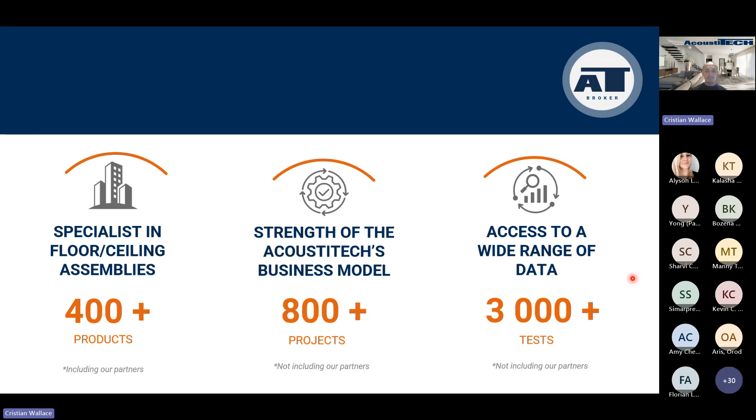So now I think it's time to talk about acoustic code requirements. First of all, we're going to start talking about airborne noises. So what are some examples of airborne noises? These are going to be noises that travel through the air, and it can be anything like music, television, dog barking, for example. These are measured with a rating that we call STC. STC stands for Sound Transmission Class. In Canada, if the audience here is from Canada, you must know that building code in Canada has a requirement for STC, and that requirement is an STC of 50. That is the minimum rating that is required for multifamily residential buildings. That is in building code.

Now, there's also going to be another rating called ASTC, and I want to explain really quickly the difference between both.

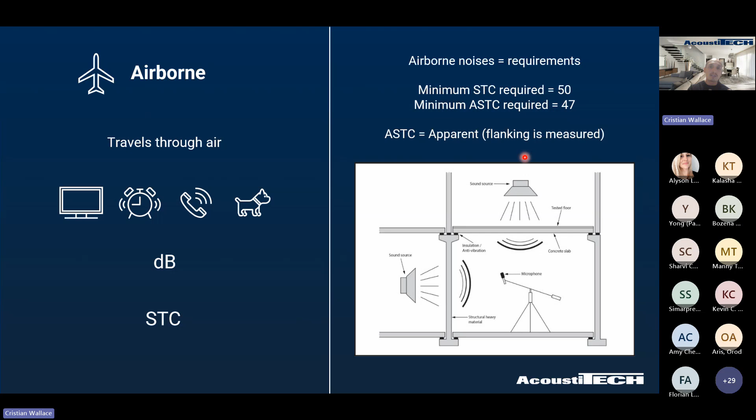Okay, so a lot of technical information, but just remember, very simple. STC is a laboratory test. Building code requires an STC of 50. ASTC stands for Apparent Sound Transmission Class, and it's a test that is done in the field. And building code accepts a 3-point decrease because there's a lot more areas where sound is traveling because flanking is measured. A little bit more on flanking later on.

Now, when it comes to impact, impact is anything that travels through the structure and objects. It can be walking, running, moving furniture, dropping something on the floor. These are all considered impact noises. And they're going to be measured with what we call an IIC rating, which stands for Impact Insulation Class.

Now, same thing goes for IIC and AIIC. IIC is a laboratory test in a controlled environment in a laboratory like Intertek, and AIIC is going to be a field measurement in an actual building.

Now, one thing that is very, very important to know, building code in Canada does not have a requirement for IIC. They simply have a minimum recommendation of IIC 55. However, in the US, it is a requirement. They have a requirement of IIC 50, which is the same for STC, STC 50.

Now, the reason why I'm saying that this is very important to know, and it's unfortunate that Canada doesn't have IIC as a requirement, is because 80% plus of complaints that we hear about are related to impact noises. If any of you in the audience here have ever lived in a condo building, you probably know or remember that most of the noises that you're going to hear is going to be impact noises. Hearing your upstairs neighbors walking around, hearing their kids running around, hearing them moving furniture at 3 a.m.

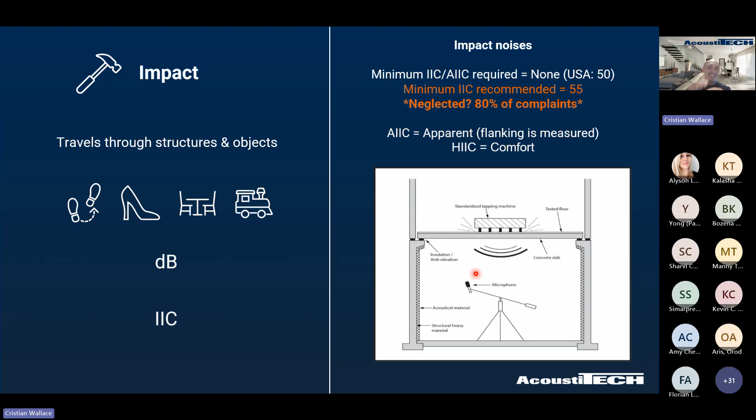Notice we're not just testing a single product, we're testing the entire floor ceiling assembly, which takes me to my next slide: field versus laboratory testing.

Acoustic solutions, especially underlayments in this example, have been portrayed in the marketplace with a lot of different ratings and it can become very confusing. Sometimes you'll evaluate an acoustical underlayment with a technical data sheet showing a very high number. Often when I present an underlayment to a client, their question is, 'what's the rating on the product?' That's a good question, but it has many possible answers because it all depends where you're using that underlayment and how it's being tested.

Let me give you an example. We put to the test the exact same floor and the exact same underlayment, but in two different types of buildups. On the left side, you see an 8-inch concrete slab on its own, no suspended ceiling. This is typically what we see in a high-rise building—it doesn't have a suspended drop ceiling in most areas, though it probably has some drywall attached to the underside. So an 8-inch concrete slab by itself with an underlayment and flooring performs at an impact rating of about AIIC 56. We're showing this because it was tested in the field, which is why you see an AIIC result.

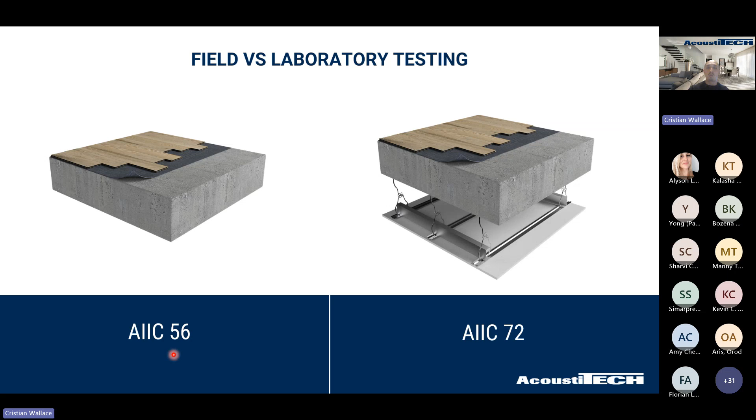So to summarize this, just try to find out how the product that you're evaluating was tested. And if it's not you that is doing that job, an acoustic consultant can come in and evaluate that for you as well. But that's also where we come in and bring a lot of clarity and transparency to everything that we're sharing.

So just remember, the rating doesn't come from a single product. I cannot identify a single product for it having a specific rating because it all depends how it's being tested. One product can behave one way in a concrete building, but it can behave completely different in a light wood frame building or completely different in a mass timber building. So just remember, testing and results come from an entire assembly. It doesn't come from a single product.

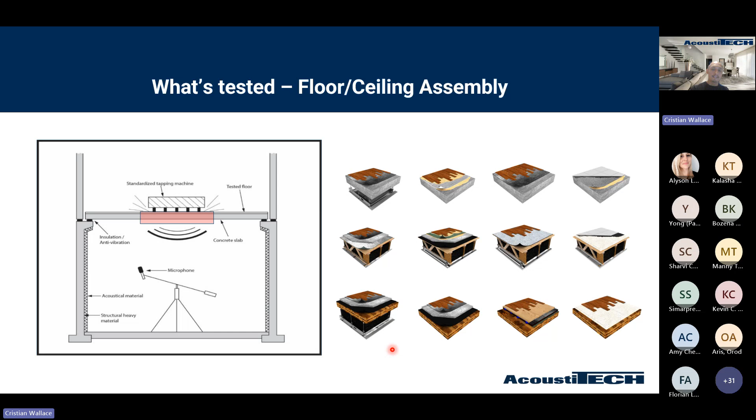So here, what I wanted to do, guys, is just share with you an AIIC on-site testing that we did a few years ago, so you can take a look at how a tapping machine looks like, how it operates, on this short little video. So I'm going to go ahead and play that right now.

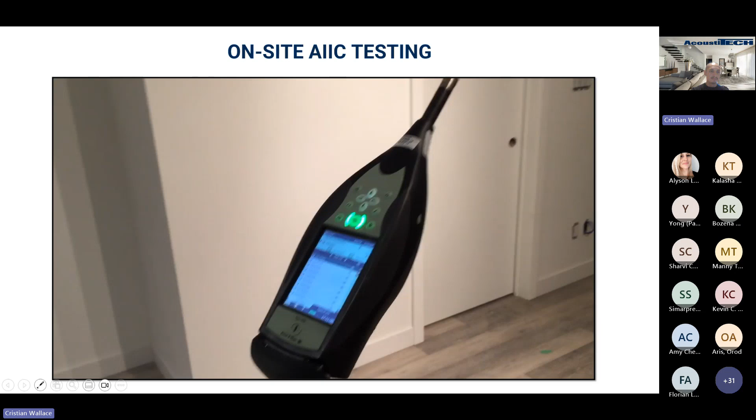There we go. So as you could see, that's the tapping machine, has a bunch of hammers underneath, creates a significant amount of impact noise to the surface of the floor. We have different areas where we're going to place this tapping machine, the same thing with a microphone below, a couple of different settings.

We get all that data, all that information, and then provide what we call an AIIC result, because here we were actually inside of a real building. And as you could see, we were not just testing an underlayment, we were testing the floor, we were testing the underlayment, as well as the structure all together.

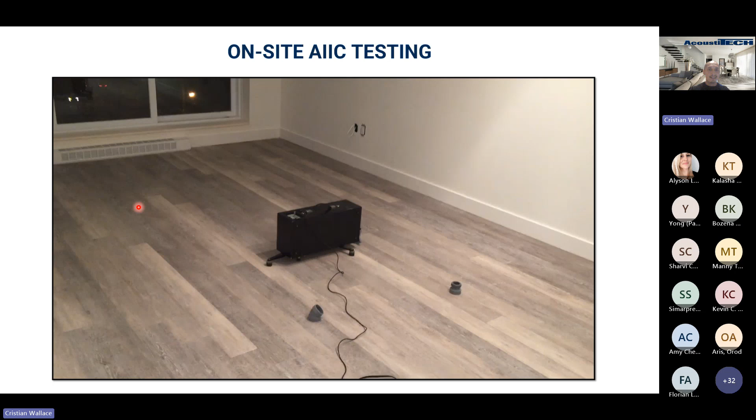And that microphone that you saw right there, believe it or not, it's something that is very expensive. It can cost upwards to $20,000. So very, very fine piece of equipment that I don't dare touch because I don't want to break it. So yeah, pretty cool, hope you appreciated that.

Now, I wanted to set the table with a couple of exercises here. Let me see if I can take the pointer off. How can I do this? Pointer. There we go, excellent.

So I wanted to set the table with a little exercise, and I wanted to share with you a couple of different sounds. But before we do that, I wanted to share with you something that is very important to know. When we're evaluating materials and we're analyzing structures, just know that each building has its own different type of frequency, right? So a concrete building by nature is going to have a lot more mass, a lot more weight, and by nature, its biggest enemy is high frequency noises.

So, very high pitched noises. If you've ever been to a concrete building and dropped your keys on the floor, you've noticed a very high pitched noise. Those are high frequency noises. So we need to select the materials that are best suited to control high frequency noises.

Then you're going to have buildings like lightwood frame or mass timber that are very prone to low frequency noises, which are bass sounds. So, you know, when you walk in a wood building, you're going to have very boom, boom, hollow type noises. Those are low frequency noises.

And you're going to have to work most likely with very different materials in order to tackle those low frequency noises. So do not think that because one product worked very well in your concrete building, that it's going to behave the same in your wood building. We have to work with different products because we're having to deal with different frequencies and different issues.

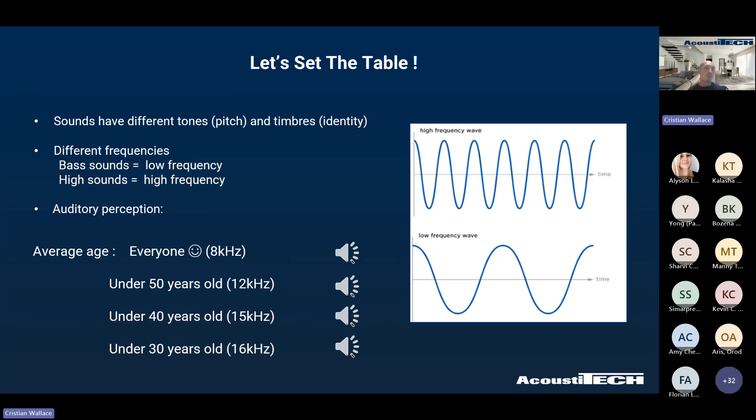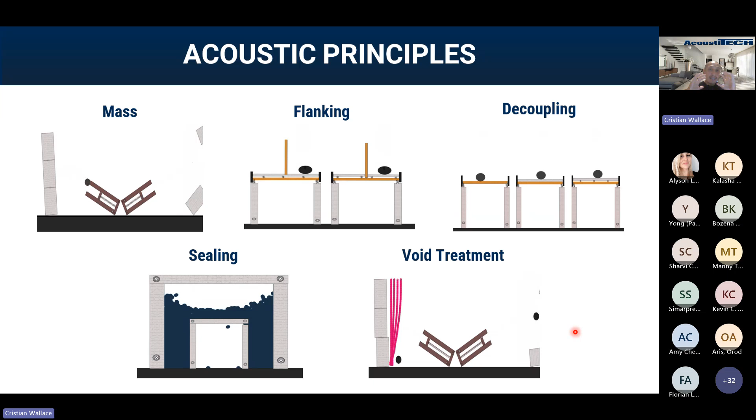Now, a little bit more on flanking, because this is a very important thing to grasp. It's one of the easiest things to control, and it's one of the things that could make a huge difference inside of your project.

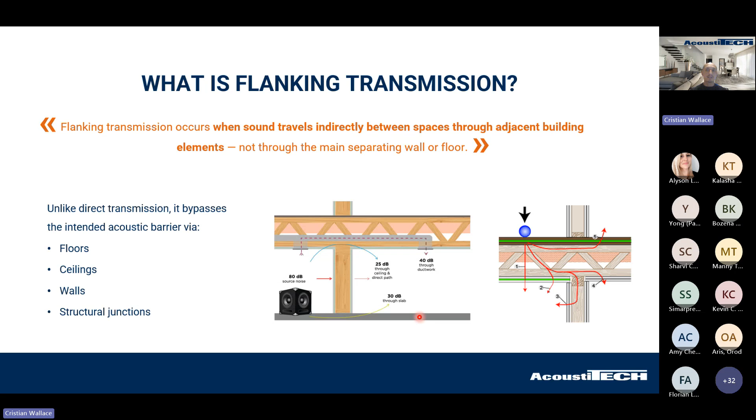That takes me to my next slide, propagation of sound in different structures. We're going to start with concrete, because a lot of people work with concrete buildings, whether commercial, institutional, hospitality, or residential. Everybody has had experience with concrete buildings, so I thought it was important to touch on this first.

For concrete structures, there's really only one place to do it right, and that's underneath the floor. Concrete buildings, because they have a lot of mass and weight, are great for STC with airborne noises like talking, music, or television. An 8-inch concrete slab on its own is already code compliant, performing around STC 55. That's why a lot of people say, hey, it's a concrete building, we don't even need to worry about impact.

However, if you leave your concrete slab unattended and install a floor directly over it, that's the worst thing you can do, because an 8-inch concrete slab performs around IIC 32. If you add a floor directly over the slab without any decoupling or separation, you may increase by a couple points, but you're still in the 30s, which is absolutely horrible for sound comfort.

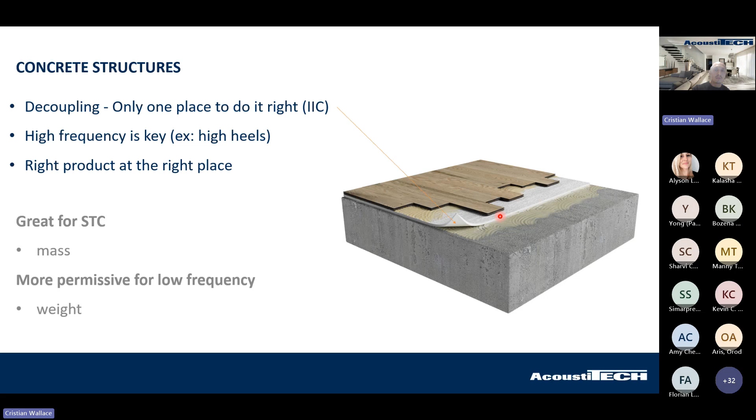So what is the best product to control high frequency noises in concrete buildings? After 25 years of R&D, today we can say with 100% confidence that the best product for this is thermoacoustic non-woven synthetic fibers. That's a long way of saying textiles react best with high frequency noises.

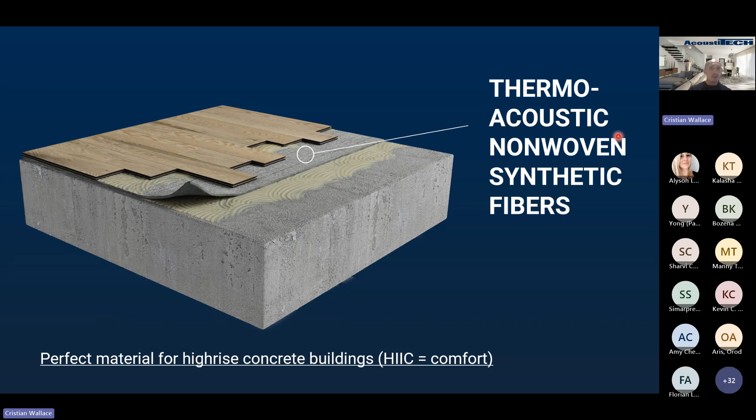Why is that? If you've ever been in an older building, or remember a hotel 10 or 20 years ago, there used to be carpet everywhere. Yes, it provided some comfort, but it was also the absolute best floor covering for controlling impact noises. So basically, we took the same technology that carpet brings for controlling high frequency noises and used it as an underlayment beneath your floors. Today not a lot of people want carpet everywhere; they want ceramic tile, porcelain stone, engineered hardwood, or laminate, which are becoming much more popular than carpets. So to maintain good acoustics, you need the right product underneath, not only for acoustics but for other reasons too.

Thermal properties and mechanical stability are also very important. You'll have wood installed in some condos, and wood expands and contracts, so you need something to hold that flooring from moving. You'll also need different elevations for transitions. You want to work with something that has a good environmental impact, something greener. So we have acoustical membranes and textiles made from recycled synthetic fibers, something practical.

Easy to use. Whenever I'm talking to an installer, they are very worried about the weight of the product they're using. There are underlayments out there that weigh 120 pounds per roll, and there are other types that weigh only 16 pounds per roll. So you can understand that makes a huge difference in productivity and speed of execution on a site.

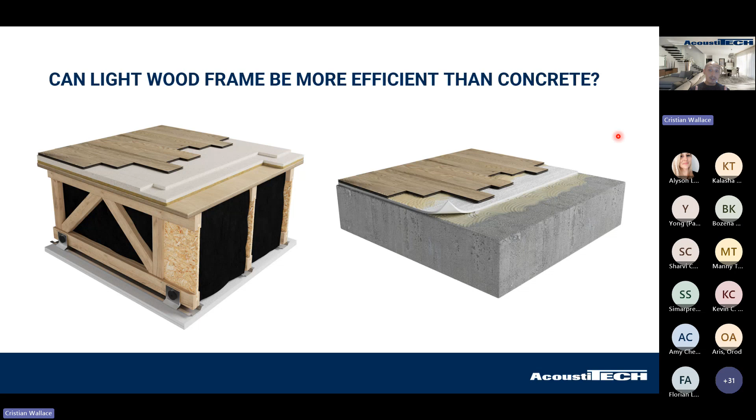Now, talking about light wood frame, one of the first questions that comes up is, can light wood frame be more efficient than concrete? And the answer to that is absolutely yes, it can definitely be more efficient than concrete. However, there are a lot more areas you have to think about, and these are all the areas I'm going to go through.

First of all, you're going to have to think about your floor covering. Not everybody knows this, but we've done hundreds and hundreds of tests to compare all the different types of floor coverings - laminates, vinyls, engineered woods, tiles - and they all behave differently. Even within the same type of floor, say two engineered hardwood floors from different manufacturers, because of their composition and quality, they may have a big difference in performance. For impact performance, you can see a difference of up to 5 points comparing two different types of flooring.

Now the next step is the acoustical membrane. Your acoustic membrane can influence your result by up to 7 points.

Then you're going to have your wet topping. Now, if you remember, the wet topping is there for what? It's there for your airborne sound control, because you're adding mass to your building.

After that, you're going to have, or I hope you would have, some sort of resilient material underneath that wet topping. That material can influence your result by up to 8 points, which is massive. It's very, very important to decouple that wet topping from the rest of your structure.

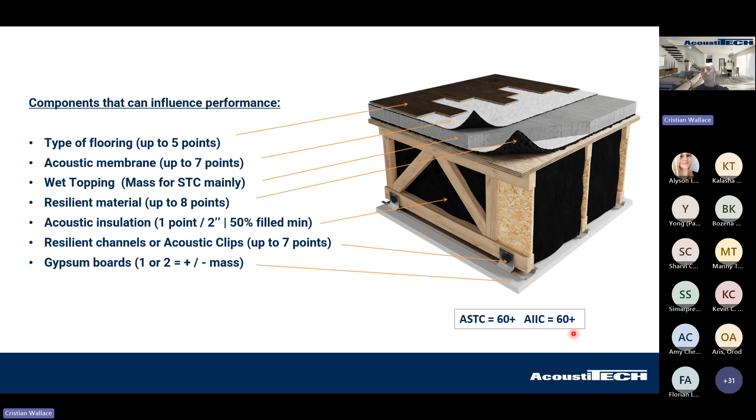Now, if we're moving from a 50 to a 55 to then a 60, you're not going to be able to hear that person over you at all, or very, very slightly, unless they're literally trying to make it a purpose for you to hear them. You're not going to be able to hear them otherwise. So 60 is really a high end luxury standard of a rating. Hopefully this gave you a little visual of what these ratings mean.

So I am going to talk a little bit about the alternatives to wet toppings, and I'm hoping I'm not going to be running out of time here, but it's going well. So thank you for sticking with me.

I wanted to talk about the advantages of alternatives to wet toppings and the importance of those. This has become a really hot topic through the years because there's a lot of benefits from moving away from a wet topping to a dry topping solution, including making it a very environmentally friendly and sustainable solution. It's going to be the most effective way to lower the amount of embodied carbon inside of your building by moving away from a wet topping to a dry topping solution. Also, the weight factor: you can literally be reducing your weight from 20 pounds per square foot when using a wet topping to about 5 pounds per square foot when utilizing a dry topping solution.

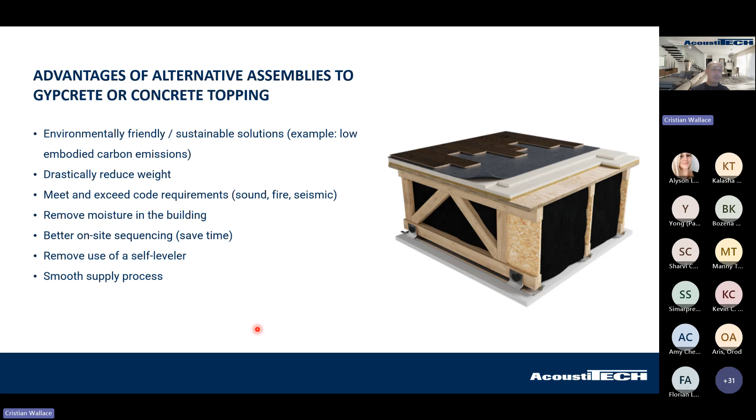Also, you're going to be able to meet impact as well as fire requirements with these types of systems. You're going to have a situation where you don't have to worry all that much about moisture and temperature control and curing time. Sequencing on a site can be done much better as well, and these products are going to be compatible with a lot of different types of floor systems.

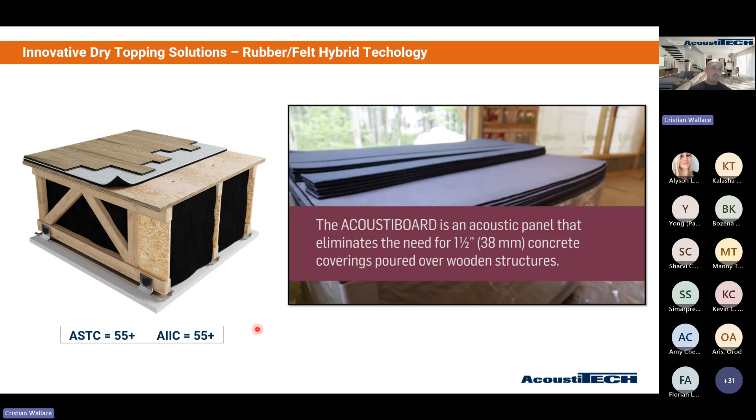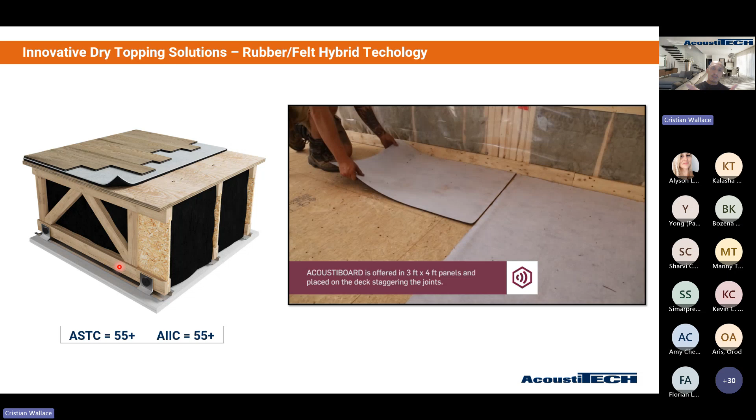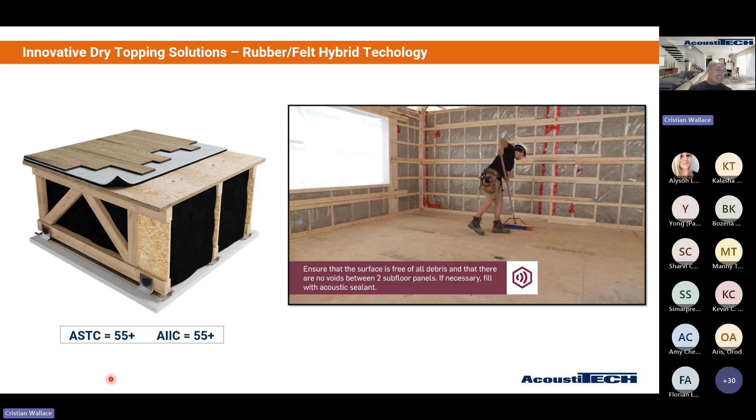So let me talk to you a little bit about these types of systems. First, here we have an example of a rubber felt hybrid technology where we have these panels that are 3x4s. They're completely floated, laying directly over your substrate, and I'm talking about light wood frame construction here. As you can see on the video, these panels go down very easily. They're completely floated and butt jointed. This type of product, along with an acoustical clip and 2 layers of drywall, is able to perform at an ASTC of 55 and AIIC of 55, which is amazing for a product that doesn't involve any sort of wet topping.

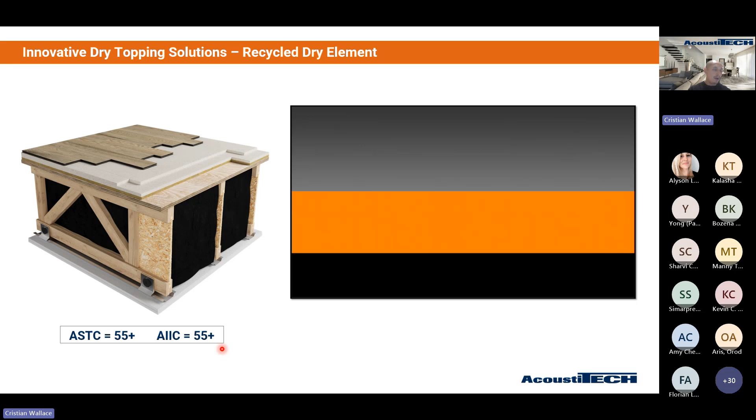Now, the next product I want to talk to you about is a recycled dry element, which is literally a combination of recycled paper and recycled gypsum, all in one panel with an acoustical material underneath.

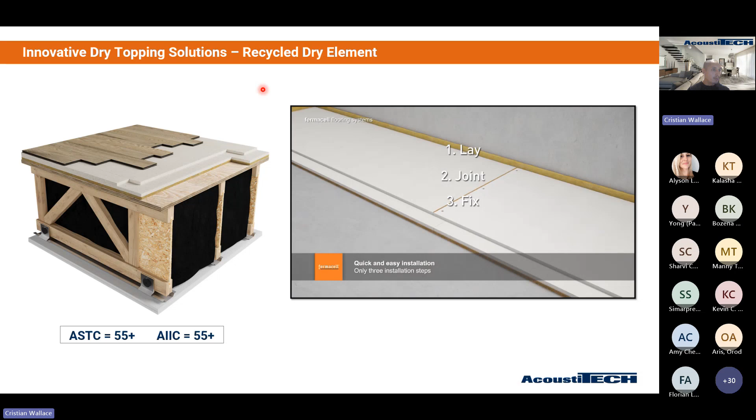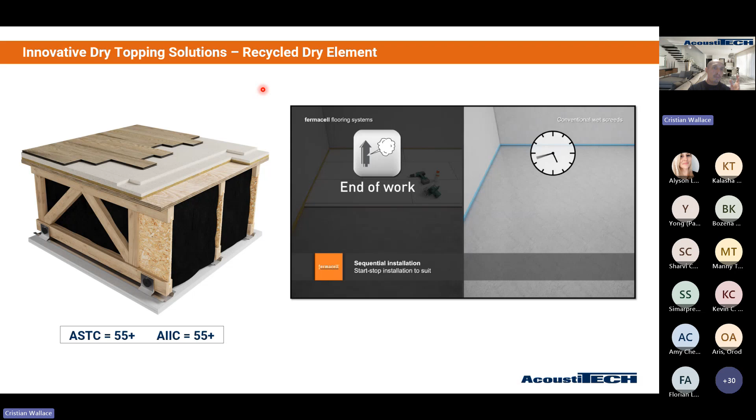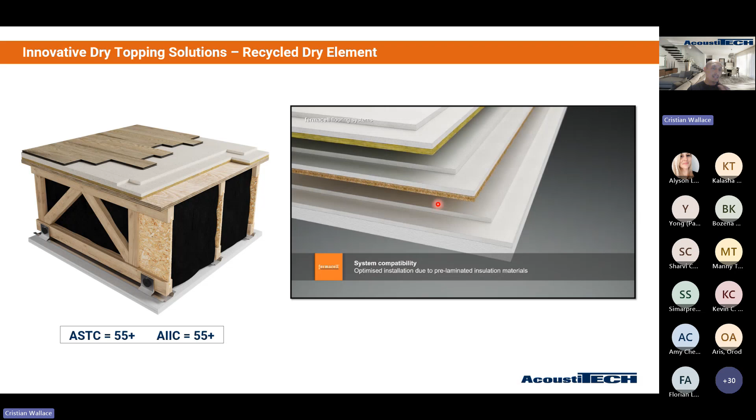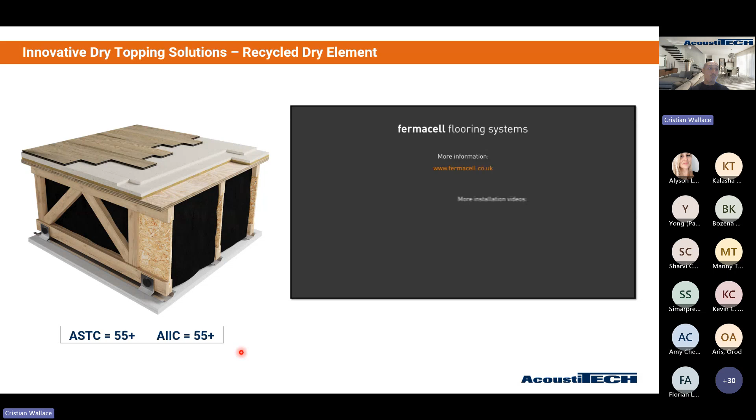These panels are also floated, just fixed to each other. What makes this product very special is that it's very versatile. You can use almost any type of flooring over it: tile, laminate, vinyl, or even a nailed-down hardwood floor, so long as the nails don't go through the panel and touch the structure. So a product like this with a laminate floor, as an example, with an acoustical clip, can also achieve ASTC 55 and AIIC 55, which is really good ratings for a system that doesn't involve wet toppings at all. So allow me to give you an example of 50, 55, and 60, but in a real-life scenario.

You remember what I was talking about before, about somebody walking on top of you? So here we have a recording I want to share with you. If you have your headphones on, please now do the opposite: turn the volume up, because normally this is not going to be very high. You're just going to hear some footsteps. One assembly performs at a 50, another performs at 55, and the last performs at 60. Hopefully you can spot the difference. I'm going to play that in 1, 2, 3.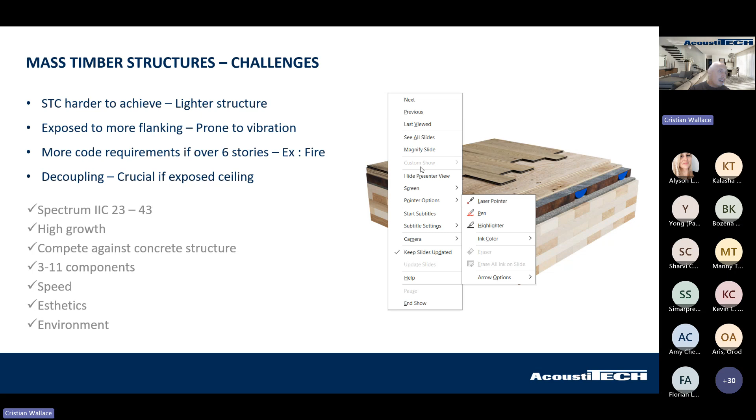Now, one other thing that makes this very difficult is that 9 times out of 10, when you're working on a mass timber building, what you want is to have those ceilings exposed. And when you have those ceilings exposed, you're literally removing one area that we can play with in order to control acoustics. So all we're left with is the top portion of the project. This is where we have to get creative, on top of the CLT panel as an example, where decoupling is going to be extremely crucial.

So let me show you an example of how different mass timber is to concrete. We did the test - we tested a 5-ply CLT and compared it to an 8-inch concrete slab. We tested it for impact on its own, and the mass timber 5-ply CLT performed between 21 and 23 IIC. A bare 8-inch concrete slab performed between 28 to 32, which is better - maybe not drastically better, but it is better than mass timber.

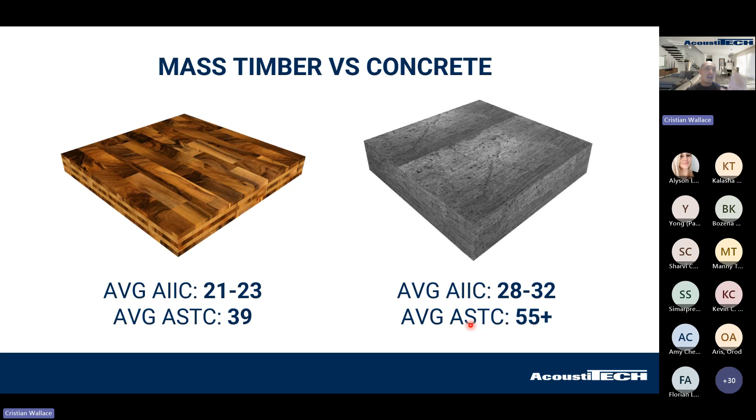And then we tested airborne. It's airborne that you're going to see the biggest difference. A 5-ply CLT performed at around 39 ASTC on average, but an 8-inch concrete slab performed on average an ASTC of 55. So effectively, we're talking about a 16-point difference, which is huge. And this is simply because concrete has a lot more weight and a lot more mass.

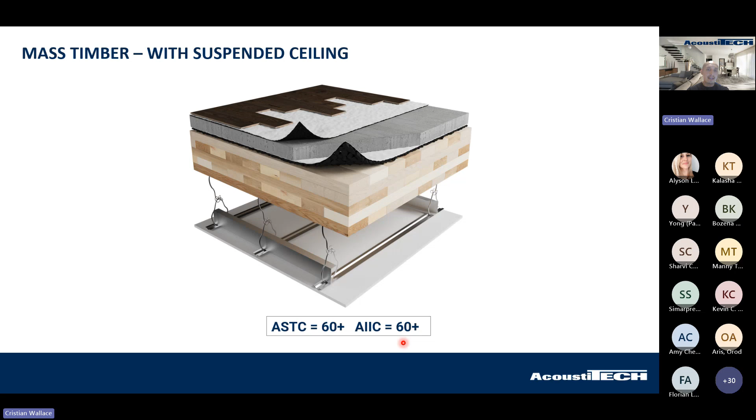Now, if you're working on a mass timber building that can allow for a suspended drop ceiling, fantastic - then you have more chances of actually obtaining an ASTC of 60 and an AIIC of 60 as well. But let's remove the suspended ceiling for a minute and just think about the other ways we can control a 5-ply CLT with an exposed ceiling.

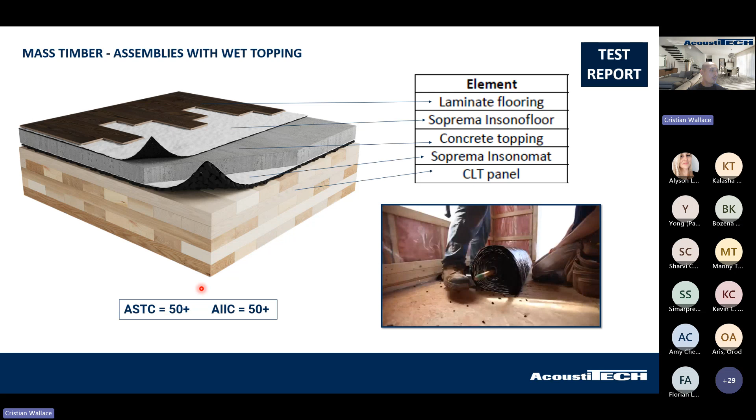Now, wet toppings are still very popular in mass timber construction. So if you're working on a project that wants to use some sort of wet topping, you're going to have your CLT panel, a rubber-type membrane underneath the panel, as well as an inch and a half of concrete topping, then an underlayment and a finished laminate floor. This is going to perform around ASTC 50 and AIIC 50, meaning that you can be code compliant with the right solutions with an exposed ceiling.

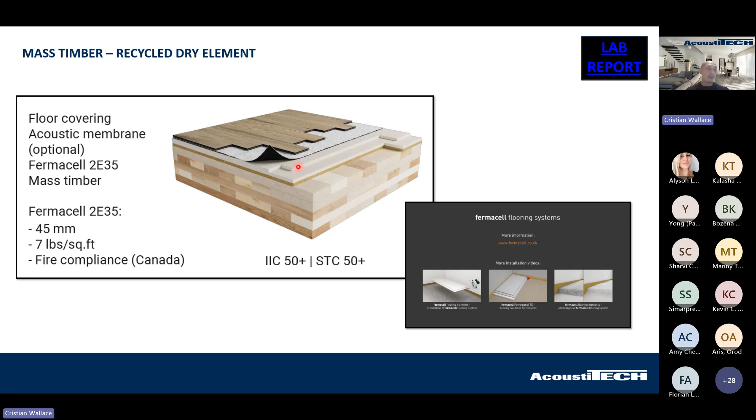However, if you want to move away from wet topping and go with something completely dry, we have our recycled dry element, again used completely floated on top of the system with exposed ceilings, recycled dry element, underlayment and flooring. We were able to achieve IIC 50 plus and STC 50 plus, meaning we're code compliant with something completely dry, with a system that's also able to respect fire code requirements. When you're over 6 stories here in Canada, you need to comply with encapsulation requirements. Sometimes you need wet toppings for that, but we now have products that comply with Type X certification and encapsulation requirements without involving any wet toppings at all.

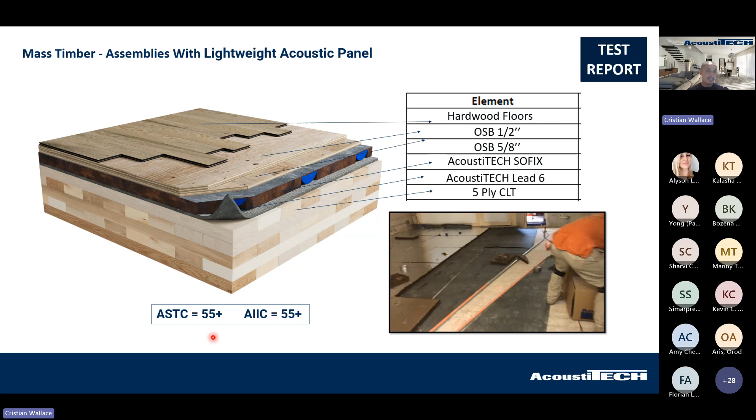If you're working on a project where you want to achieve higher results than building code, we have dry solutions that can get you to a higher rating. As an example, a lightweight acoustic panel combined with 2 layers of OSB, your finished floor can get you to a rating of 55 plus STC and 55 plus IIC.

We even have systems that get you higher ratings than that. These are discrete isolators. As you can see in the picture, discrete isolators combined with mineral fiber, mineral wool, 2 layers of plywood, and your finished floor, we can get results in the 60s, STC 60, IIC 64, with exposed ceilings, which is absolutely fantastic results for mass timber.

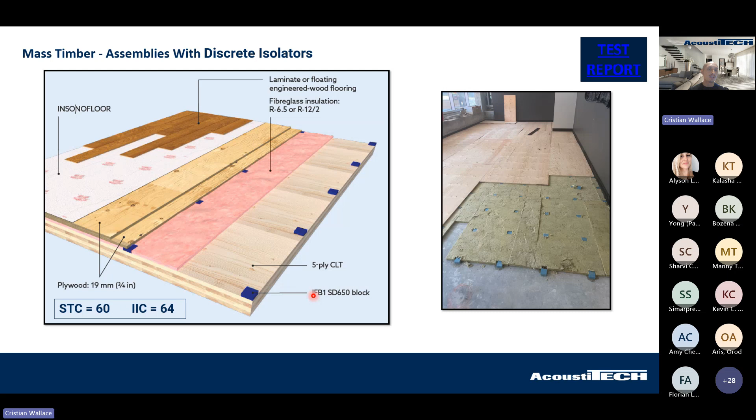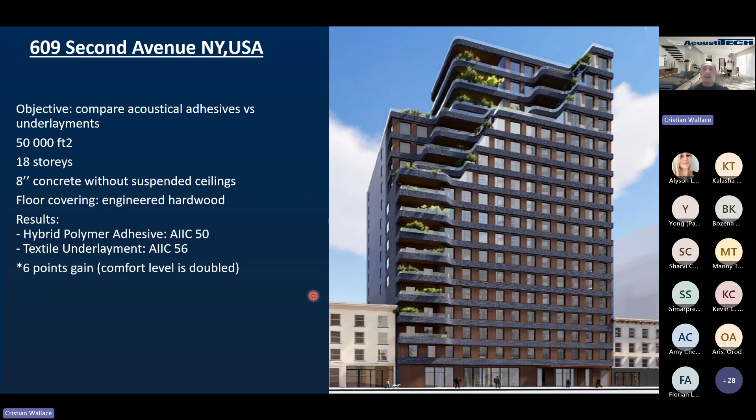Now we're going towards the end, guys, and I'm not going to spend a lot of time with our case studies because we're heading towards the end. I want to be respectful of your time. Just know that on our website we have a lot of case studies you can take a look at. We explain full stories of what the challenges were, what kind of solutions we utilized to tackle those issues, and what kind of performance we obtained at the end.

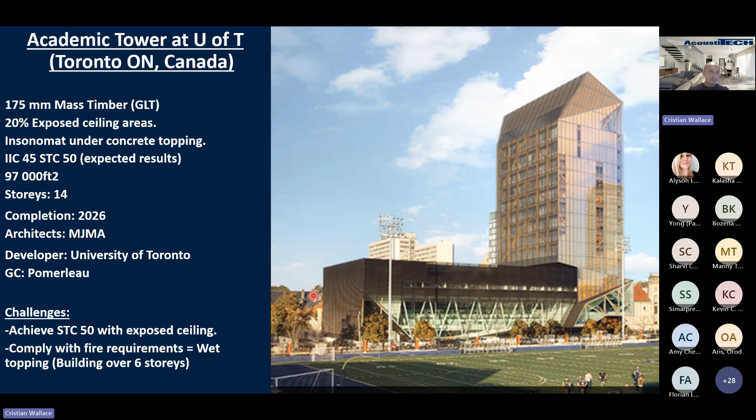So very quickly, guys, why AcoustiTECH? We're all about bringing you into the ecosystem of brands that we have. We're all about sharing the expertise we've been able to gather in the 25 years we've been working at this. We have all the data, we're very transparent, and we want to share that with you. We do this all through a consultative and creative approach that is customized for you.